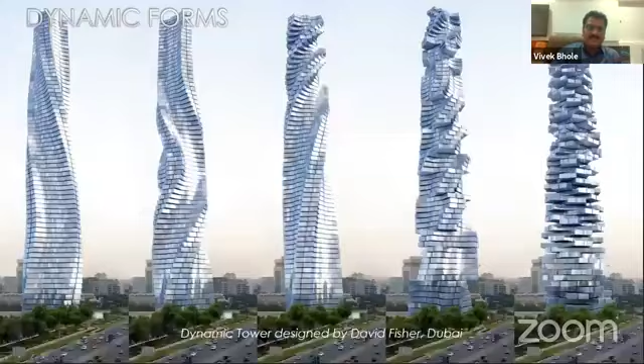So we have seen in past many years across the world, the skyline is changing. You can see the skyline in Hong Kong, London, Chicago, Dubai. Chicago is the birthplace of high-rise buildings, where actually the definition of high-rise changed. And then we saw a huge development coming up in China, particularly near Hong Kong. Then the twin city started popping up, called Shenzhen.

And I have seen in my lifespan of 35 years of practice, there are 2 new cities coming in between Hong Kong and Guangzhou, equally big high-rise cities. Then Dubai, we all know in the last 25 years, Dubai has gone from where to where. I have seen new places like Marina coming up.

And London was, you can say, a low-rise city for centuries, and suddenly got those high-rise buildings in its skyline. Not only these few cities, there are many more, like Sydney, and now even in Mumbai you will see a lot of high-rises coming up. This is inevitable because of urbanization and the maximum utilization of resources. High-rises are a must. So we'll be studying these topics today.

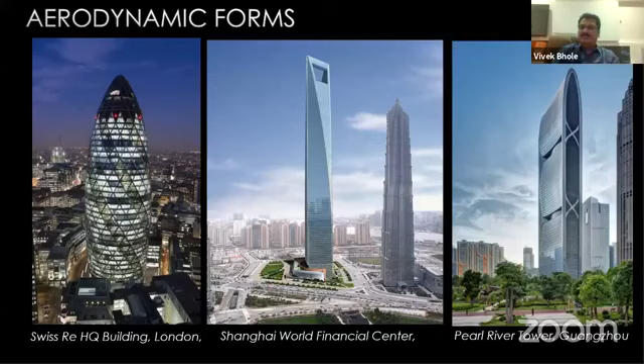Then these aerodynamic forms: the tower in London designed by Norman Foster, the Shanghai World Financial Center next to the Jin Mao Tower, then the Pearl River Tower at Guangzhou. Now, these are a few examples of those high-tech modern buildings.

Then this is something very futuristic, the dynamic tower. This is in Dubai, and the architect is planning to do something similar in many places in the world. So all these towers are in one place. How do we achieve them? Unless we know the methodology to construct and design, it is not possible.

When we design a small bungalow, the design or the planning aspect will preside over the structure. But when we design a high-rise tower, that too a super high-rise tower, the structural system is the most important. We say the high-rise building will fail, the design will fail, only if your structure will fail.

And the second is your vertical transport, because these buildings are so massive and the number of users is more. So if your vertical transport system is not adequate enough, not managed properly or not designed properly, it will reduce the

functionality of the building. In the types of structures, the very basic is the concrete frame tube, where the central core goes through the center of gravity of the building and takes care of all the lateral forces. In high-rise buildings, more than gravitational force, the horizontal forces by wind pressure and seismic forces are more stringent. And when you go much taller, the wind pressure will govern the entire design of the building.

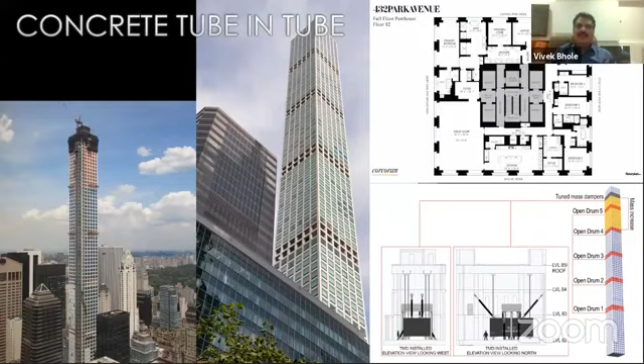It's almost a 60-year-old building, designed by SOM, and one of the very first buildings in Chicago to use this system. There are a few more, like 33 Canada Square in London, then Alcoa in San Francisco. They are based on the same concept.

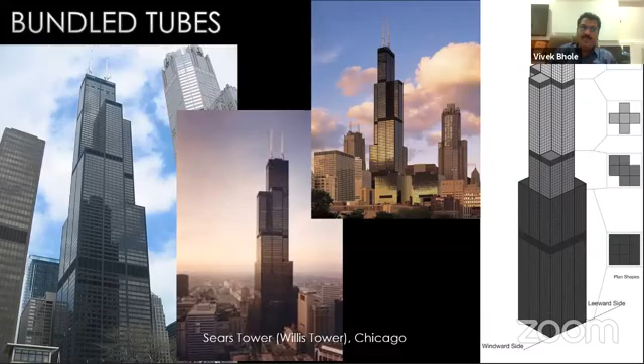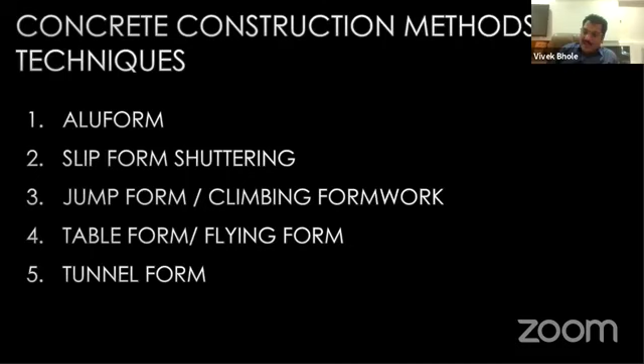So you may have heard about Mivan shuttering, because it's like a brand name. Mivan is a manufacturer's name, but people call all aluminum shuttering Mivan. So aluform is something similar to this, where you don't just cast one column, then the beams, the slabs and the staircase separately. The whole floor will be cast in one go, and the shuttering is then taken ahead to the next floor.

So you make a mold out of these aluminum panels, and you pour the concrete inside in one go. So if you see the staircase, the beams, the columns, the walls, everything will be cast in one go. So the construction is monolithic, the speed is faster, and the efficiency of the concrete is there. So you get additional carpet area out of it. So there are many benefits of it.

And particularly in India, because of the restriction on the sand, which we use in the concrete and the plaster, we cannot actually get good quality sand in many parts of India. There is a lot of silt and salt content. So in such cases, crushed stone can be used in the concrete, and the sand plaster, mortar plaster, is totally eliminated in this entire construction methodology.

In fact, in all the structural systems, in all my buildings, we are avoiding plaster completely. So the external fascia is either concrete directly, or if there is a cladding, then it will be cladded. From inside, there is no plaster. We'll just put some gypsum plaster or something like plastic putty. Plaster, being the weakest part, needs to be avoided. This is the concept of aluform.

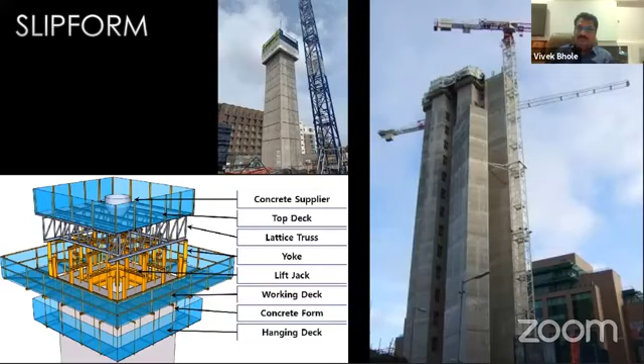You can see in the diagram, the concrete supply is from the top with the help of the crane and the hopper, and then the formwork and the scaffolding take care of everything, including the safety. And then the shuttering and this whole system keeps on going up with the hydraulic jacks.

This is one more system, table forms or flying forms. The tables are lifted by the crane and placed, and then this gutter kind of formwork, the ready-made shuttering, is there for the beams, and then the entire slab can be constructed. Again, these tables can be taken from below, lifted and kept on the top. So it is called flying form shuttering.

This is one more popular way of doing concreting where the speed of construction is very fast. In fact, many Turkish companies claim that you can cast a floor in almost 36 hours. The initial concrete strength can be achieved, and then with some minimal supports kept intact, the tunnel shuttering can go above and cast within the next 36 hours. So the speed is very good.

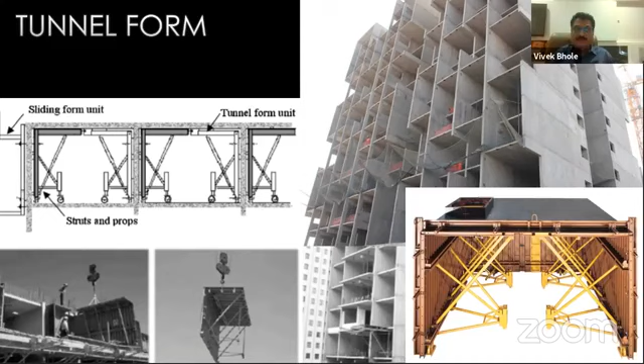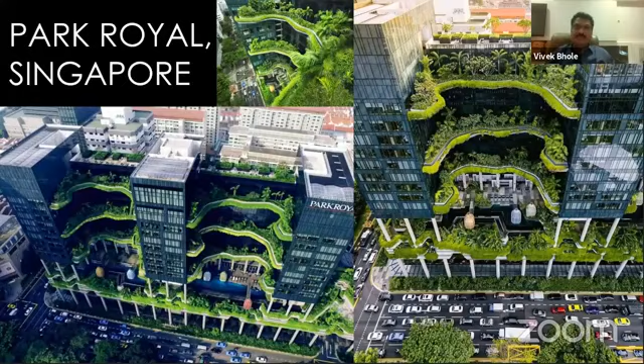This is one more project. This is at Singapore. Now, Singapore is a place where you will see all the good tropical buildings. This is not a high-rise building, I know, but it's a commercial building, and you can see the amount of greenery they could maintain on this. And because this is a hotel and commercial building, with a mall below, you can see the way they have actually done the landscaping on it. At the bottom level, it's a retail space, and you can see that triple height arrival and the public realm they have created below the canopy and those triple height spaces.

This is the entrance lobby of the hotel, and you can see the section now. Very interestingly, they have created this porous environment within the building. Making a massive building without greenery is what is being forced on us with the additional FSI they are giving in most of the cities, but Singapore has got a huge FSI, and still they could manage it with those porous forms.

Again, something similar. This is Oasia Hotel at Singapore. I have stayed in this hotel, and it's very interesting. Whatever form you see, there is a lot of porosity inside it. The outer skin is in aluminum with a lot of greenery, and those inner pockets have this natural landscape happening. If you see the plan here, the building footprint at the hotel level is like an L shape, and you'll see a lot of hollows happening here, and in some places here.

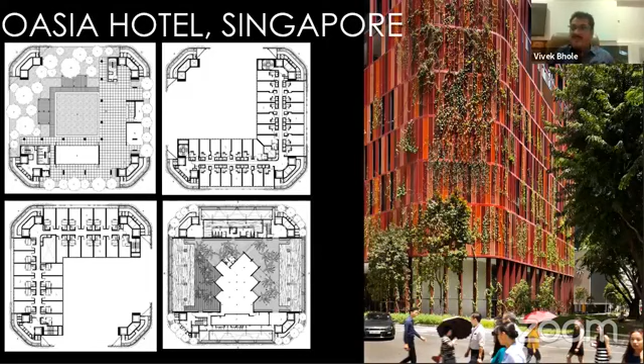So the outer skin is giving the entire form to this haphazard structure, but it doesn't look haphazard. It looks very interesting because it creates those semi-covered spaces within the building. Now, with the bylaws we are facing in Mumbai and most parts of India, we may not be able to execute this kind of project, but someday we'll get this freedom and we'll be doing something similar to this.

Then look at those sky lobbies, and there's a restaurant there, and from the top, the crown part. Now this crown is like 10 floors high. It's a hollow space, and you hardly require 2 or 3 floors for your AC outdoor units. The remaining is just to create the character of it. They could have actually gone for some photovoltaic elements there to generate an alternate source of energy, but I think the designers tried to achieve the form, the greenery, and the overall concept through that outer skin.

Moving to the case studies.

This is the first project. We are doing this for a group called Prestige from Bangalore, but the project is in Mulund in Mumbai. Now, this is a very scenic site. I've got a hill on the rear side, and in the rainy season, you actually see the clouds coming down. And this is properly a residential area. Then why am I making a commercial building there?

This is a question. So this is a very huge development, more than 1.5 crore square feet of it. And we already started 6 towers, 55 story plus. When we have got so much of residential, when you make a mixed-use development, you give people the choice not to travel and go directly to their workplaces. And that is what is going to be the ideal scenario in coming days.

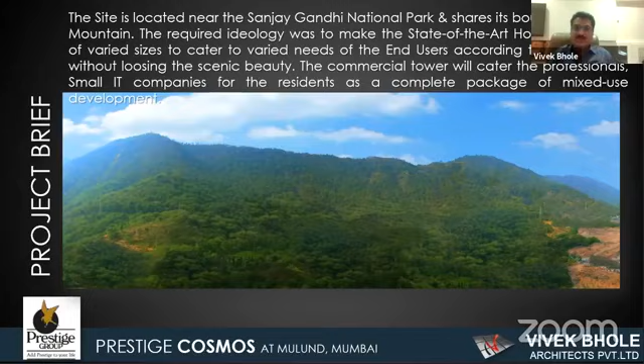When it comes to a commercial building, a very important factor is the column grid, the structural grid. As I said, in any commercial development, the live load is almost twice that of a residential building, even the dead load is more, and you require column-free spaces. And as I told you, for designing a high-rise tower, you require a structural system. So here the structural system is central core with peripheral frame tubes. The grid is 7.5 meters by 12.5 meters, particularly designed for the parking and the column-free office spaces.

Then we wanted free movement of cars, because this building is 8.5 lakh square feet of carpet area. Considering the basic minimum requirement of 75 square feet per person, you'll have more than 11,000 people working there. But in Mumbai, there are many office spaces where the density is less than 35 square feet per person. In that scenario, the user load will be tremendous. You require good movement space there, particularly the separation of pedestrian and vehicle movement.

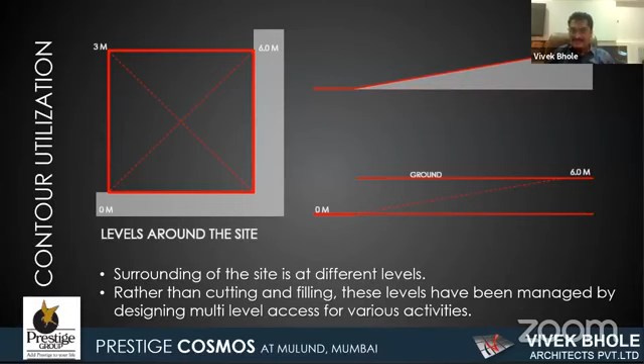Then the requirement was so peculiar that we had parking in the basement. We wanted a complete lobby on the ground floor and part of it on the first floor, then the podium on top, and then the office floors above. This makes it really tricky, because you enter at some level without disturbing your entrance lobby. Because, as I told you, more than 11,000 people are going to come there. And in a commercial building, the most tricky is the vertical transport, because the peak hour is very short.

In a residential building, we consider a peak hour of 6 hours. But in a commercial building, the peak hour is hardly 1.5 hours. In the morning, 9:30 to 11 o'clock, that is the maximum user load you have to take care of, and the same happens in reverse in the evening. So your vertical transport has to take care of that, and you need a good waiting space. So the lobby is very important. I didn't want to disconnect the lobby because of the parking in the basement and above the lobby. So I kept a scissor ramp. Now, this is a very interesting concept.

This is a scissor ramp which is inside. So scissor ramp is a concept where a ramp is always helical. When you go for multi-storied, multi-level parking, it's a helical ramp. But just imagine two ramps parallel to each other going up. So one can be used for going up, the other can be used for coming down. So they are interlinked two ramps.

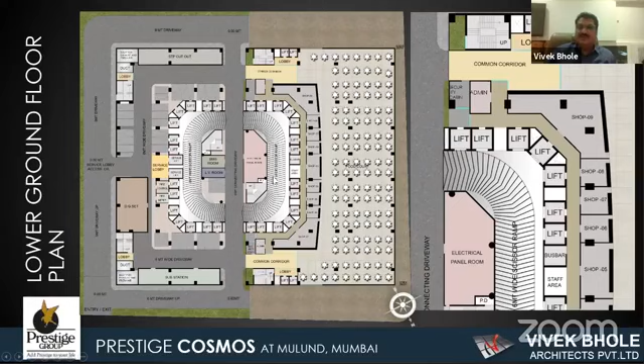So now this scissor ramp will lead me, one ramp will go up, one ramp will go down. If I come here, again, I've got one ramp going up, one ramp coming down, because these are actually two helical ramps, as I said. And then I've got a huge food court with stalls on one side, and a service lobby and service storages here. This is one level below the food court. So I've got a full basement there. My services are there, and efficient parking.

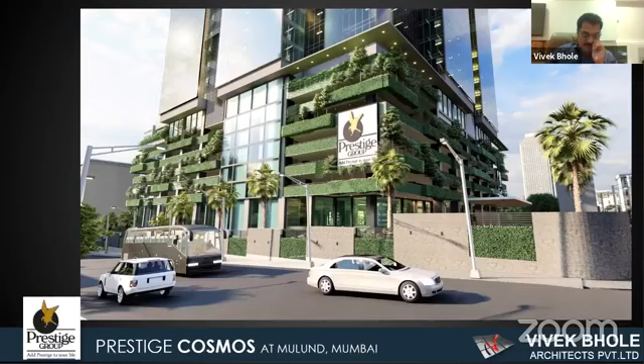This is just a first cut view of the podium. And then the amenity floor plan. With such big offices, you require a lot of amenities like a multi-purpose hall. You require recreation, daycare center, library, meeting rooms, conferences, banquets, gaming zone, fitness centers.

And then the typical floor plan. Now, as I explained, the column grids, these columns in the periphery, are not going to take care of any lateral force. All the lateral forces are going to be taken care of by the central core. There's a huge concrete mass which is going to take care of that. If you divide this building into 4 corners, you consider this as one wing.

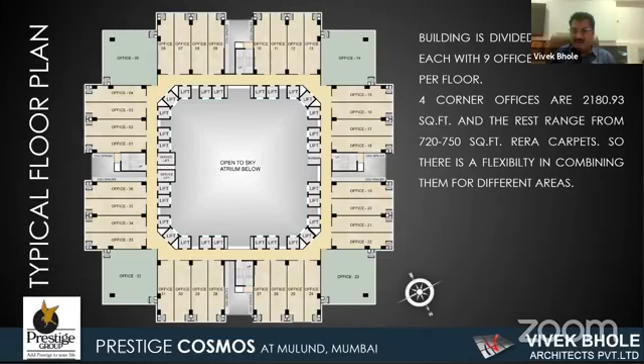So when we see the number of elevators, in fact, when I started the presentation to my client, if you have heard about Prestige, they have executed more than 2 crore square feet of commercial spaces in Bangalore alone. They were not really convinced with the idea of having so many elevators in the center, but the requirement was such, and when we showed them this, I told them this is going to be one wing. And just because all the wings are interconnected, you are seeing that series.

So there are only 7 elevators. And the service elevators are common for all 4 wings. So when you've got only 7 or 8 elevators per wing for such a huge user load, then it is sufficient. He was a little skeptical. So we had to do the entire lift analysis. And then they accepted this.

This is a schematic plan where we have got the basements below, the ground level, as I explained, then the parking which is there on top of the entrance. Now, to explain properly, the scissor ramps are actually acting in this central zone here. They are connected. So when I enter, I can actually go inside at the ground level, I can go inside the basement, and the same ramp I take to go up to the upper levels without disturbing my lobby at the ground level. And this is the view.

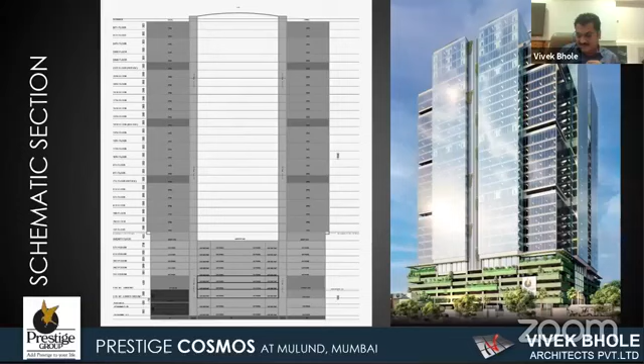These are the basic parameters. It's 8,34,000 square feet of FSI. So almost similar carpet is there. Total built-up area is around 18,74,000 because of the services and parking. The total height of the building is restricted to 120 meters. So 26 habitable floors, plus podium, plus amenities, etc. And then a 2-level basement, 5-level parking. The FSI versus carpet efficiency is very important, because what you construct, if you cannot sell, is not going to be useful. So that is 95%.

So we sat with different consultants. I worked with Lerch Bates, Tak Matthews, and many other consultants, along with the lift companies, for various projects. So I took consultants' help to generate this, where I wanted the maximum traveling time not more than 1 minute, and maximum waiting time not more than 1 minute.

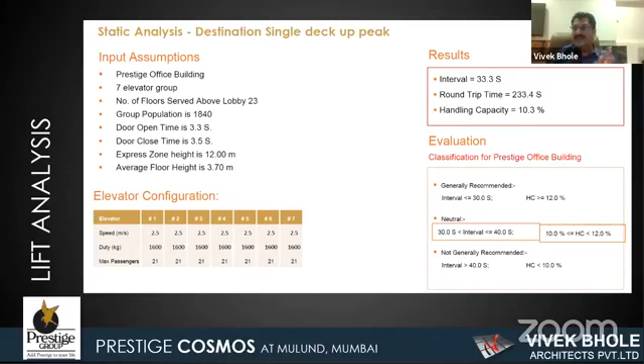And to achieve this, we studied different variations, and then we tried to change those parameters and did the iterations to achieve maximum efficiency in terms of the traveling time and the user load, and on one side the cost. So if you see here, we tried to change the number of elevators. If the number of elevators is 6, what will happen? If the number of elevators is 8, how much handling capacity can it take care of?

Then if I change the speed of the elevator, it is a very important factor for cost implications. Just for the sake of example, at 2.5 meter speed of elevator, let's say if it is costing 30 lakh rupees, if I go for 6 meter speed, it will cost me 2 crore rupees. And if I go for 9, it will cost furthermore. So here the maximum speed we tried was only 3 meters per second, because the building is not a super tall building. My next case studies are super tall, so we'll see even up to 9 meters per second speed.

Then here we tried to play with the size of the elevator, like 19 passenger, 21 passenger, 23 passenger, what will happen? And then the group population. So we tried all these iterations and we came up with the solution. So this was the first project. Now, why particularly did I show this project? Because it's a voluminous high-rise commercial building. We don't have many tall commercial buildings in this part of Mumbai, although there are many in the city side.

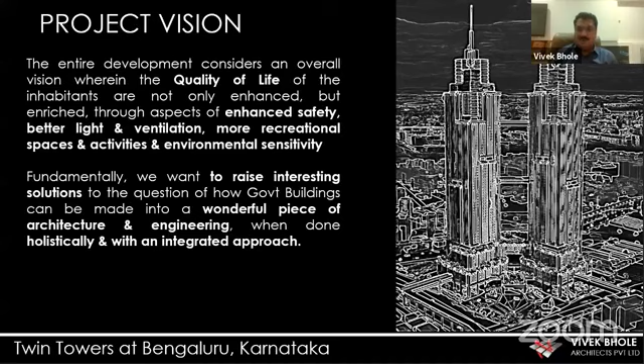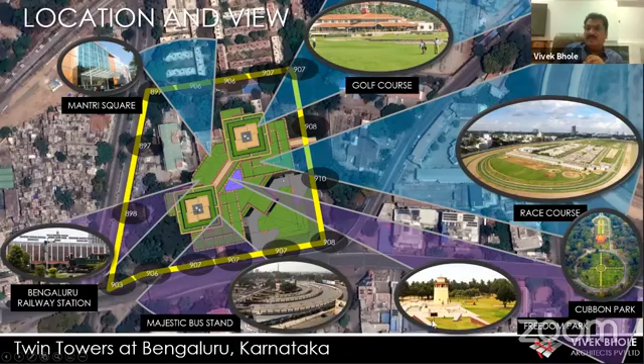And then these are the views. On one side, I am seeing the race course. On one side, I'm seeing the golf course, the Mantri Square, Bengaluru railway station on this side, and the Majestic bus stand. This is what we wanted to connect with the building with the skywalk. And then Freedom Park and Cubbon Park, these are the two parks which are visible in this direction.

So how do you achieve the economy? By reducing the footprint of the building, because anyway we had to go for 50 stories, and with the structural system we selected in such a way that it will give me maximum economy. So we'll see that in the next few slides.

So core area is only 23% of the total building footprint. And the vertical transport, I have achieved that 1 minute waiting time, 1 minute travel time by having a few express elevators. So again, they are in the next few slides.

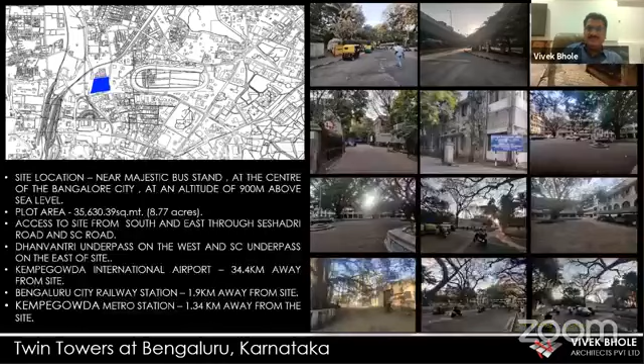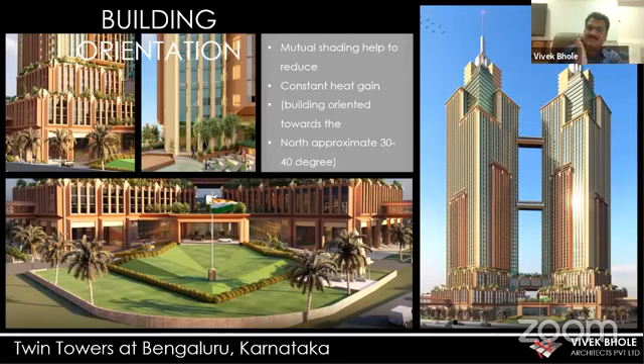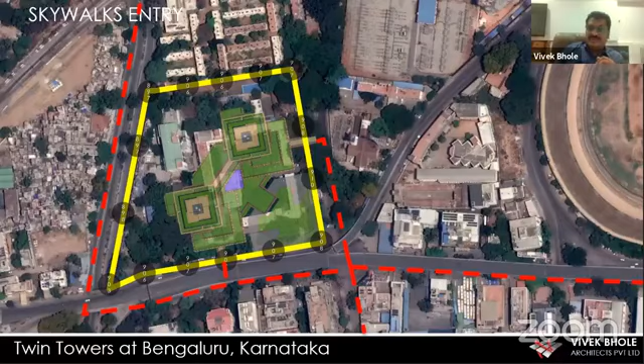So these two red lines are actually the skywalks which are connecting Vidhana Soudha and the Majestic bus terminal. For internal, these are the vehicular movements. The green is entry to the existing building, which they wanted away from this proposed building. These are the entry and exit points.

Landscape is a very integral part of architecture design. Particularly for this project, we were very careful about it. We divided this whole into different zones, and then, like we said, life, space, and buildings. And we created that different hierarchy into that, and we segregated different zones.

So public zones are there because there are a few people whom we will not allow on the upper levels. This is an office building, security is important, but there are amenities which will be accessible for visitors. So the public zones are very well defined by the landscape also. The circulation is very important. So there also we have segregated visitors and the users, and we have used a lot of landscape in the facade here.

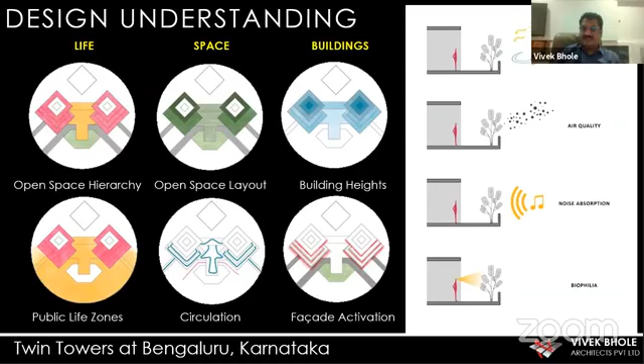Okay, I'll not go into this in detail because there are two more projects to explain, but we had a lot of thought process in designing those green spaces. We had a lot of interactions with the landscape architect, and because I had those terraces, we wanted that design to be biophilic. So the interior space and the exterior space should be just an extension of each other, and how efficiently we use them, because any landscape area which is not accessible or not useful functionally will not be maintained. So we wanted every part of that landscape to be useful.

Then the design approach was, we wanted to create one good impression at the entrance, the vistas, the grandeur, the top-up experience. So we created an artificial mound. I'll show that. Then there was some area where we created a mini forest kind of thing where people can sit inside those shadowing trees. Outdoor gym was there, and a jogging track is planned on the top of the podium. We have got podiums at different levels, so in one of the podiums we give access to the jogging track through the wellness center.

Then at podium levels, we created that space which is a spillover of restaurants where people can sit and have lunch. And there are a lot of activities which are stress-relieving activities, and community activities like people meeting, having good discussions. There's an amphitheater, and finally on the rooftop we have got some very VIP offices, so we have got landscape connected to that as well.

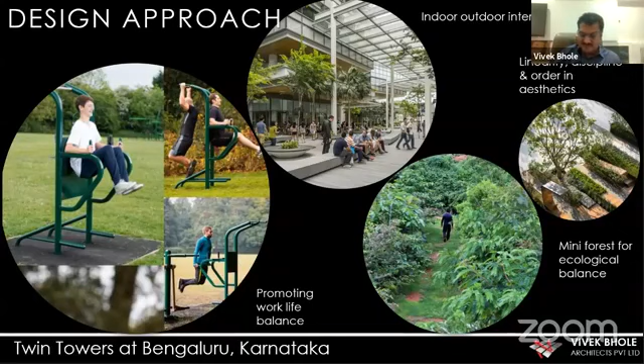So this was the design approach where we wanted to give them work and life balance. It's not just that they are working there; they are spending the maximum time of their life in those spaces, because they go home for sleeping and eating, but when they are awake, they are in this space. So again, this is the approach we had. All those porous elements and tapered elements we created, we uniformly distributed. You will see in our design how we created that interaction of the green spaces and open-to-sky spaces with the covered interior spaces.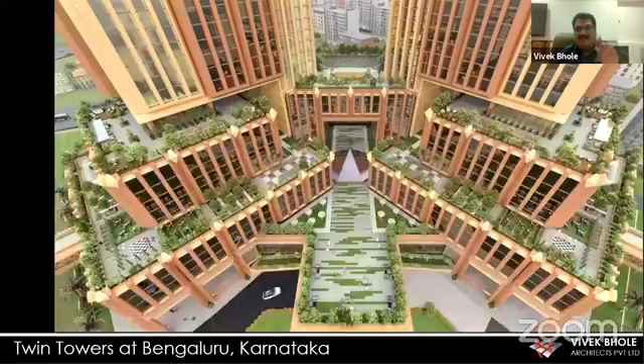When it comes to aesthetics of the building, the vertical elements accentuate that verticality. Your vertical building looks more vertical. If you see these examples, those vertical elements are my sun-shading devices as well. Then spires are always inspiring. All across the world, the tallest buildings, when they claim to be the tallest of the city or the country, achieve one more bonus height through that spire. It is not just for the sake of aesthetics or a symbol of victory. It's functional as well. It's a lightning arrestor, sometimes an antenna, but a lightning arrestor for sure. And that gives the iconic element to the building.

So my spire was the tapering element, starting right from the building. The last floor is also usable, almost 4,000 square feet of usable space, and then the spire is there. So it's a functional spire. And this is where the maximum appreciation has to happen, because this is the most visible angle from the flyover, from the road junction to the building.

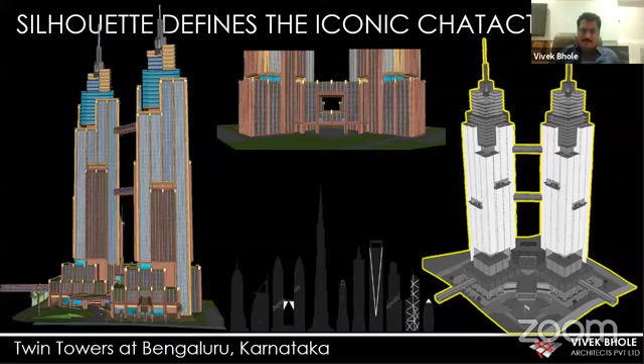I always believe that any building which has a character you remember, you don't remember by the detailing, because as a passerby you see a glimpse of it and remember the building by its silhouette, the outline of the building, not by the elements. So the building outline was achieved with those punctures in between created by the two sky bridges. There's a lobby. The lobby at the other level. And then this is just a lighting concept.

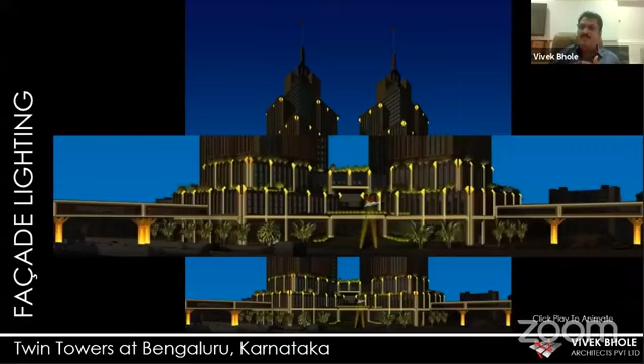So lighting will keep on adding gradually, depending upon the day, the festive season, and the time of the evening. The lighting can be simulated. This is the detailing we use, pixel line detail. You get tremendous flexibility when you use these kinds of fixtures.

A lot of green building considerations were there, because we wanted this building to be a platinum rated green building. Small detailing, a lot of thought process was behind it. So not going into the detail, but there are many slides on this.

More than that, we wanted this building to be not just a green building for the namesake, but actually a good livable building. So we have got this green roof, the heat island effect to be negated with native plantation, and then we have got good rainwater harvesting, outdoor green spaces you saw, and a very high performance building envelope.

Now, the building envelope is formed of two elements. One is the vertical elements, which are actually precast elements, and then the glass, which is high performance glass. We have got photovoltaic cells on the top portion of the crown, and then sky gardens at individual floors.

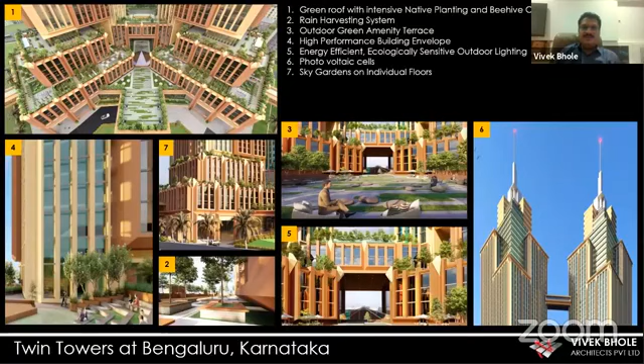So these are all actual rendering pictures of this project, where we wanted this to happen across the periphery of the building, the decks and the podiums.

This is a very important factor, how to make your building earthquake resilient. So the central core, as I said, is going to take care of your seismic forces, and the peripheral columns are only taking care of the vertical load. The wind tunnel testing will be done for this. This is the structural system we are suggesting.

All the peripheral columns are composite steel columns, where the steel tubes will be filled with concrete, and then steel decking sheet will be used. On the steel decking, you don't really require any shuttering. You just pour the concrete and leave the decking sheet as it is.

And from below, if you have noticed, all the structural members are plastered. That is a fireproof vermiculite plaster. Then to take care of the lateral force, viscous dampers will be introduced at intermediate levels.

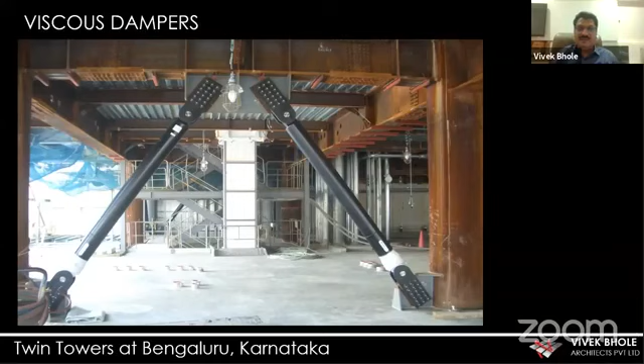Then for fire safety, one additional provision is the sky bridge, which is connecting these two towers together. So you get alternate means of exit. Then staircases and lift lobbies are pressurized.

Maximum chances of fire are due to the electrical cables. So that is avoided with bus bars. We'll have rising mains through which the electricity will be provided. Then a separate fire lift is there, and a separate fire staircase is there on the outer wall. You can see it here. Then refuge area across the periphery.

And then the core has got multiple entries and exits. So even in the office floor plate, you can actually run into the core with various exit routes. The core is designed in such a way that you have got maximum options for exiting. And then sprinklers will be provided. All these fire requirements, the codal requirements, will be taken care of.

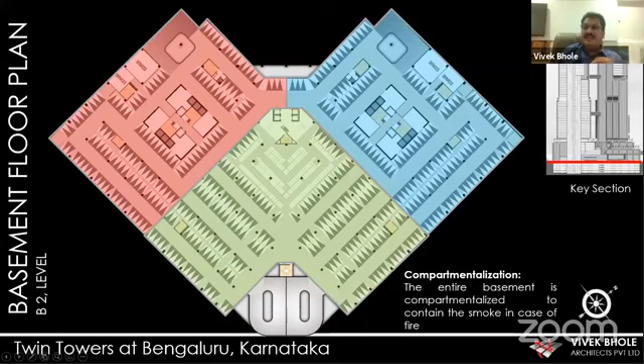A very important part of the parking system is compartmentalization, where in case of fire, the smoke doesn't enter into the other compartment. So this is how the compartmentalization will be done. And then the exit distance. From any point to the staircase, the maximum exit distance is 30 meters.

So if you see all the staircases in my complex, they are covering the entire footprint of the basement. You have to place the staircases in such a way that one need not travel more than 30 meters in case of any mishap. The normal firefighting system, the codal requirements, fire detection, alarm system, I'll skip this. Public address system is a very important part of commercial buildings.

Access control. From a safety point of view, the barrier, turnstile and flap barriers are very important because you don't want the public zone and the private zone mixed up together. It is very difficult to manage that way.

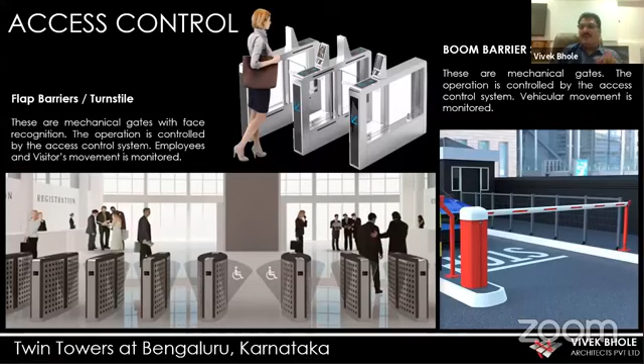And these kinds of buildings are mega buildings where more than 15,000 people will work. So in such cases, you segregate them at the entry level. There are multiple entrances, multiple lobbies, and you segregate them with multiple options like RFID, fingerprint, and face recognition.

Then surveillance is a very important part of safety and security. And in a pandemic-like situation, the elevators will be touch-free elevators, and then the lobbies, you need to have huge lobbies. Like if you see, the lobbies are so spacious. Here, the lobby is a double-height lobby. For these 3 elevators, there is huge space to stand there.

The main entrance is here. So we have segregated those different entries. Like this is the lobby for the express elevator. This is the lobby for the amenity floors. And this is the lobby at the lower level. So we have got 2 different entrances.

The pedestrians are entering at the ground level. The vehicles are entering at the top level because the porch is raised. If you have noticed that mound there, the vehicular access is at the top level, so that you've got multiple options of entering into the lift core so that they are segregated properly. That is what is also needed in the current situation.

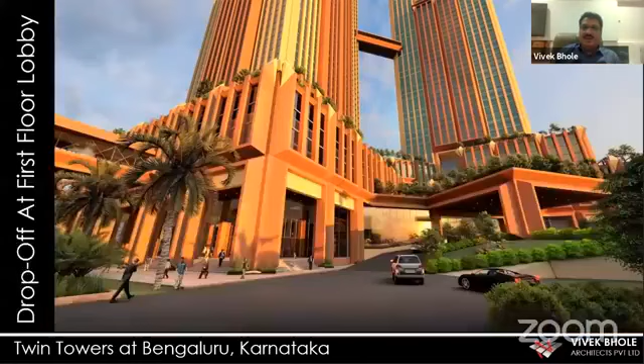At this level, this entry is not there. At the ground level, the entry is here. So through the colonnade, you enter through this entry here. So these are the pedestrian entries, and the vehicular entry is at the first floor level. Yeah. So this is the first floor, and this is how the entrance on the ground floor and the first floor is happening. So this is that first floor entry going on top, and then this is that colonnade which is giving entry at the lower level lobby.

So on the second floor, we have got this auditorium, and then we have got different lounges, lobbies, business centers. These are the amenities for the offices. This is the view from the second floor into the first floor double-height entrance lobby.

So this is the third level where we are actually seeing the double-height auditorium's top part. Then we have got banquets, a huge food court, and a restaurant. So all the eateries are here. Some fine dining is there, a part of the food court as well. And this is the level which is connected with skywalks on both sides. Then there will be a security check, and these two elevators will either lead them to the entry level if they want to enter into the building, or if they have got enough accessibility, they can go inside these areas.

So this is a schematic section. The sky bridge is connecting that second floor level. We have got double-height retail space. This is a colonnade here. We have got 5 basements, that is allowed in Bangalore, and that is kind of mandatory. And then we have got these amenity floors.

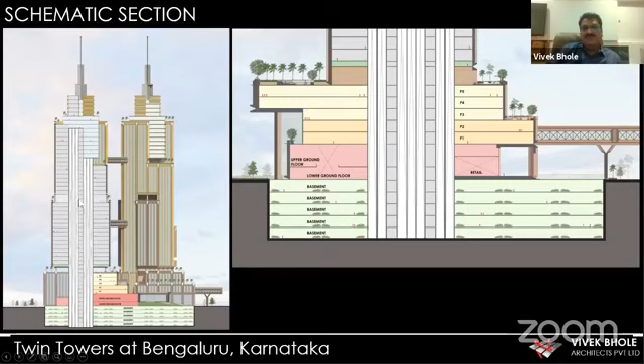Then the upper deck level, this is the top level of the podium where we have got this amphitheater happening here, and then the towers above. So in this section, you will see those 2 skywalks connecting at 2 sky lobby levels, and then we have got these refuge areas across the building.

A very important factor is how you achieve that efficiency in the lifts. So in the single shaft, there are more elevators. If you see, they are segregated. Some text is missing here. So these blues are the express elevators.

And then in elevator set D, you have one set of elevators serving the lower level. So you will see there are actually 3 sets of elevators. A few elevators connect the lower levels here, a few connect here, and a few connect here. So in one shaft, there are actually 3 sets of elevators. That is how you achieve your efficiency.

There is software called Elevate, which simulates the user load and the movement of the elevators, and how you take care of the movement of the people. So there is the sky lobby here, and there is one set of express elevators stopping here, which takes care of this portion. So you have to do it very carefully.

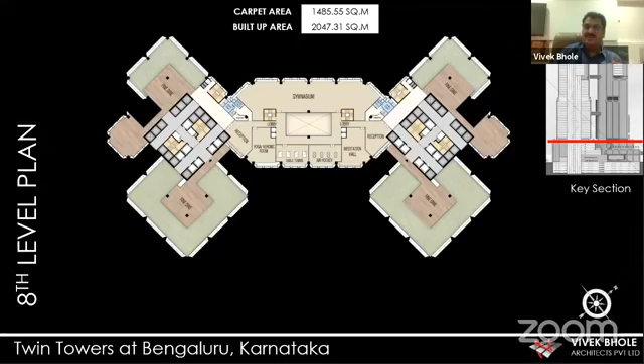And then the typical floor from 11 to 14, and 15 to 16 are the refuge floor area. You will see it in the schematic section. And you can see the way we have divided the offices. This is the core, and offices have direct entry from the core itself. So there is no corridor as such. You can divide this whole floor plate into 7 offices without adding a single square foot of corridor.

And then the top levels, 53rd, 54th and 55th floor, the offices. Now you can see very few elevators access those offices. They are dedicated elevators, the service elevators are there, and the minimal requirement of the core is there. Of course, for this kind of public building, you need to take care of physically handicapped people. All the toilets, ramps, staircases, lifts, walkways need to be taken care of.

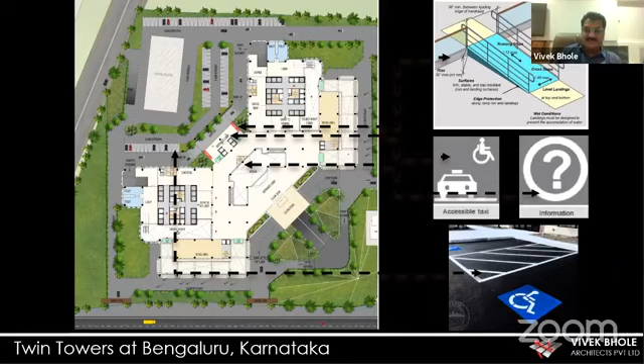Now, sustainable building design to take care of the urban heat island effect. All the terraces are converted into softscape, which will take care of that heat island effect. Then these are a few features we have used. We don't really want maximum turf or lawn area, because they are not really good for green building, so they are minimized wherever required. Maximum shrubbery and plantation, the trees are there.

Building envelope: the glass is very carefully chosen. The vertical elements I have shown on the top level, where I have that glass cuboid as the crown of my building. I have horizontal sun shading devices, and then a combination of DGU and low-E glass. That is what will give me the efficiency in energy.

Then water management. All these features are there. We know minimum water exchange, minimum water use. These fixtures are there. Then we are going to use double flush, and then we are going to have a lot of percolation happening. All the paved areas are permeable paved areas, so the groundwater will be recharged.

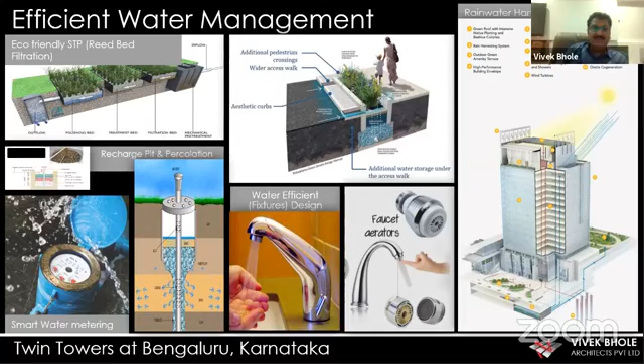Role of colors, a very important factor. So we have used all light colors in the horizontal surfaces so as to reflect maximum sunlight. And then all these elements, simulations, they are part and parcel of our architectural design. But because the architectural character itself was so powerful, we found that hardly anything additional was needed.

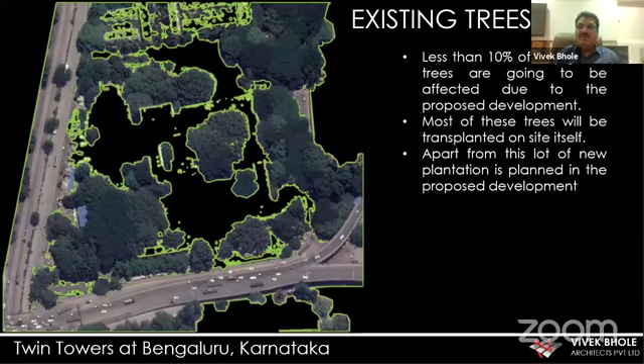Local material we are going to use. So we have got a lot of granite in Karnataka. This is very important. This is the footprint of the trees, this is the greenery which is there on site currently, and we are only using 10%. So these are the existing buildings now, and this is our design. So we are hardly touching any full-grown tree there.

This is an important factor of this design. So we are using this monolithic insulated concrete system, which is a composite steel concrete system, where a hollow steel member will be filled with concrete. And this particular system doesn't really require a supporting scaffolding system. The members are executed in a factory in Bangalore itself. So this is the kind of beam member which is being fabricated in the factory, and this is a column member which is being fabricated in the factory.

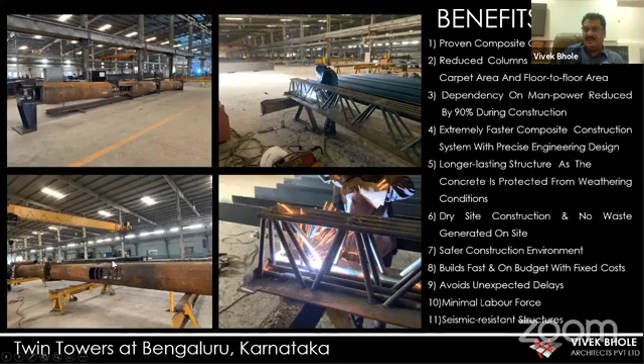And then without any support, the beam will be erected on the structural members, and then the second phase of concreting will be done. So if you note, part of the beam is already there, and once this is placed properly in place, the remaining concreting will be done. So this is a composite system which is fully self-supporting. As I said, there are no props required. This saves a lot of cost. This is quick, saves a lot of time.

Then fire safety is there because most of the members are encased in the concrete. It is seismic resistant. The sections are very narrow because this is a composite system, so the sizes of the members are very less. As I said, the fire resistance is very high. And then it's a longer lasting building, the building life is more because the main structural system is steel, and then flexibility is there.

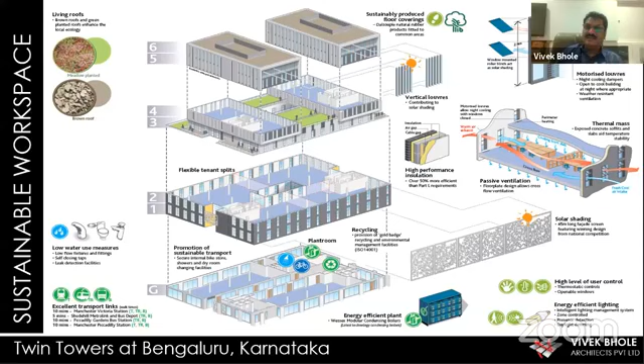Okay, I'll skip this, this self-financing scheme. These are energy efficient features of the building. I'll skip them, but there are a lot of them we have discussed. Inside the office also, we have got the combination, how the passive ventilation is done, how the recycling is done, everything is there. IBMS is a very important integral part of smart buildings.

So they take care of everything like air conditioning, ventilation, lighting, hydraulics, access control, CCTV, fire detection, lifts, and many other things. When we say ventilation, let's say there are 5 basements. You cannot keep all your exhaust fans running all the time. So you have got those carbon monoxide detectors. As soon as the level goes above the permissible level, they will start operating the fans. Something similar is going to happen with the common area lighting. So the sensors do a lot of energy saving.

Even in the curtain walls, in case of fire, the automated panels open up and the exhaust will start working in case of some double height areas. So that kind of IBMS system can be integrated into the building. Then the building and development requirements, I'll skip this.

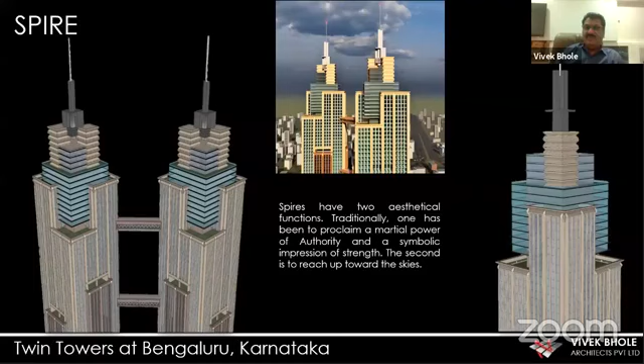Okay, these are a few architectural elements like the sky bridge. You can see the same vocabulary of architecture is derived from the building and integrated into all these elements. The colonnade, you will see something similar. The spire, as I said, is a very important aesthetic element for our building. And that's it. This is the second case study.

Ma'am, do we have time for the third and fourth?

Harshada, ma'am? Yes, sir. Okay, so I'll take 35, 40 minutes more then. Okay, fine. No problem.

This is one building we are doing in Mumbai. This is at Worli. So this is the layout. We won this competition. It was an international competition held in 2016. This is kind of the biggest urban renewal project in the entire South Asia, almost 3 crore square feet in total. And we have got the roads.

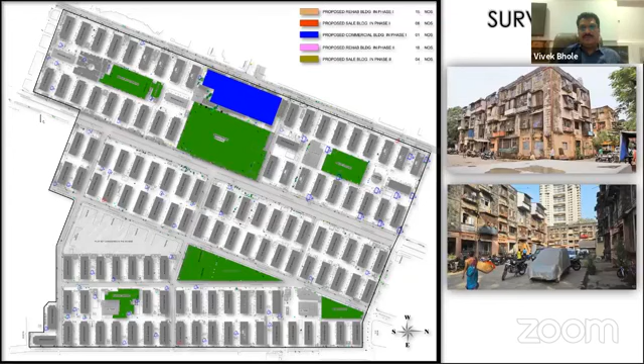So this is it. We have got around 33 40-story buildings. All these small buildings you see are 40-story buildings. We have got 10 74-story buildings, and we are going to talk about the central building, which is a commercial building. This is a 60-story commercial building.

And on this entire development, work has already started. Tata Projects are my contractors there. Government of Maharashtra is my client. This is the first of its kind development the Government of Maharashtra is doing as a developer. In the entire layout, we have got almost 8,893 existing chawls. These were constructed by the British almost 100 years back, and they are in a very dilapidated state.

For a very long time, redevelopment attempts have been happening, and currently the government is very active and very prompt, and there is a lot of willingness to do it on war footing. So the work is moving very fast. We have got some non-residential tenants. We have got schools as tenants. These are the units of schools.

Then we have got a boys' hostel, hospital units, municipal dispensaries, and a lot of slum dwellers as well, and there are some stalls. So altogether, about 1,150 odd members are to be rehoused, reconstructed, and then the sale component will take care of the construction or entire funding of the project.

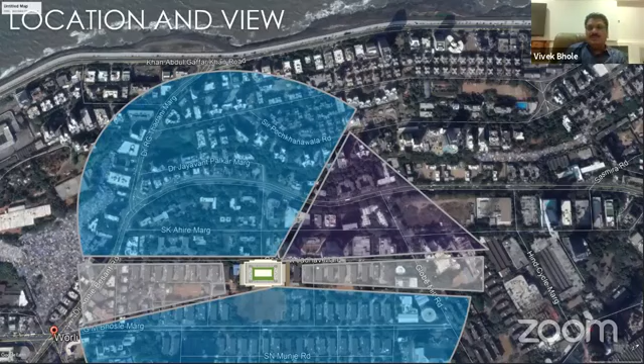So this is the entire development, this is where my residential buildings are coming up, and this is where I'm designing this commercial building. The entire concept is an exoskeleton. I'm using a central core with a diagrid exoskeleton skin in composite steel. These are not exactly the ones I showed you in the previous project. These are going to be hollow round pipes filled with concrete.

You can see the lower levels are podiums. On the upper levels, this outer skin is there with slabs in between and different floor plates as per the shape of the building. This forms the character of the entire building. The whole building design, from the basic structural system, the facade and the shape, everything was designed through parametric software, including the smallest detailing of a mullion and glass.

So I wrote this definition to create the entire building exoskeleton and structural system. This is how it is going to work. If you note, these stars are a little bigger on the lower level, and they become slender and almost parallel as the system goes up.

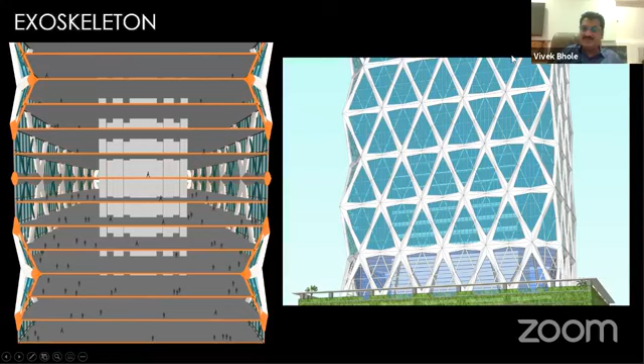The parking is very interesting here because this building is going to take care of more than 14,000 people working in it. So I needed multiple entries and exits, with vehicular and pedestrian traffic separated. I used both roads for entry and exit, and for vehicular traffic I used big 9-meter ramps to reach the drop-off level, and thereafter two separate sets of ramps, one going up, one coming down, 6 meters in width.

So they are actually two double driveway, one-way ramps, and this is how the parking is working. So once I start climbing up, the blue one is for coming down, the green one is for going up. So once I start going up, there is this drop-off area, and then I have to just keep on climbing up, and then I reach the 8th floor level.

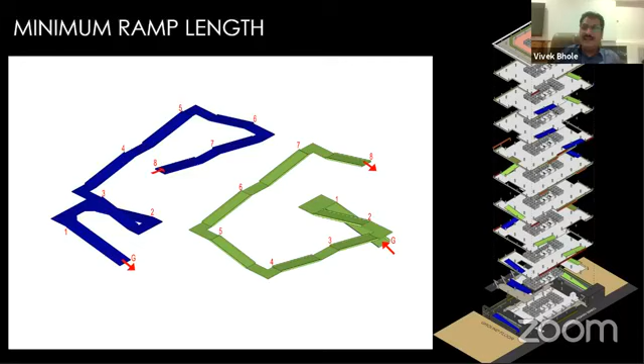When I have to come from 8th floor level, I come down, and then there is this drop-off, and then I come down this way. So instead of just taking those rounds and rounds, those helical ramps here, because the levels are a little more, number of parkings are more, I've tried to achieve that efficiency of movement through minimum bending kind of thing. And these are the podiums.

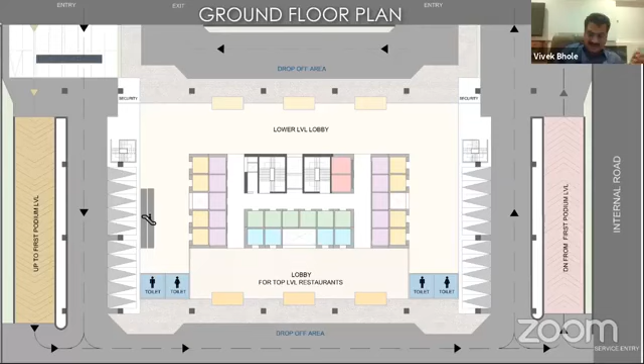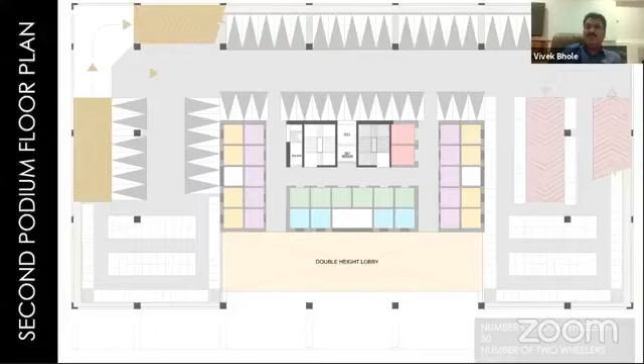So every time the position of the ramp changes, as I said, the ramp keeps on moving, so that the person will climb along the ramp. Yeah. And then on the top level, this is the E-deck level. I got a swimming pool, and then I got a club and other outdoor activities.

So almost like 1,580 parkings, four-wheeler parking. That is what we have accommodated in this. These are the different level plans where we have got those different iterations or alternatives for the sizes of the offices, because this is a government building again. And the offices, I don't know exactly what is the requirement today, but then right from 728 square feet to 3,000 square feet of office spaces, I can have complete floor plate of smaller offices.

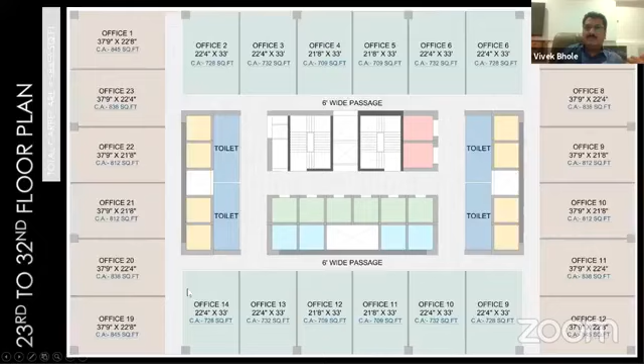Then if you note the central core, now the lifts are removed depending upon the stacking system of my lifts. Now this is the space which is not actually having any vertical movement. So I have converted them into toilets. So when I got toilets in the common area, I removed the toilets from the offices across. When I got offices and no common areas in the lobby, you'll find the toilets are there, and every toilet has got a shaft, ventilation shaft there. So this ventilation shaft is right from the bottom, and it is giving ventilation to the staircases, to the toilets.

Here you'll note that the express elevators are opening on the opposite side. This is the gathering space, and from here you have to take the elevators to reach to the next level. So you'll have to change your elevator here. This is the sky lobby level, and then this is a typical floor. If they want only 4 offices per floor, then how the floor plate will be divided. Very minimal columns, and then the restaurant and viewing gallery. This is the view, the body of the building.

The structural system is very peculiar. As I said, I've got huge column-free space there because the leasable area I want more. I don't want restriction on the sizes of the offices. And the diagrid system is my facade as well as my structural system. So that is going to take care of the gravitational forces. All the lateral forces, as I explained, will be taken care by the central core.

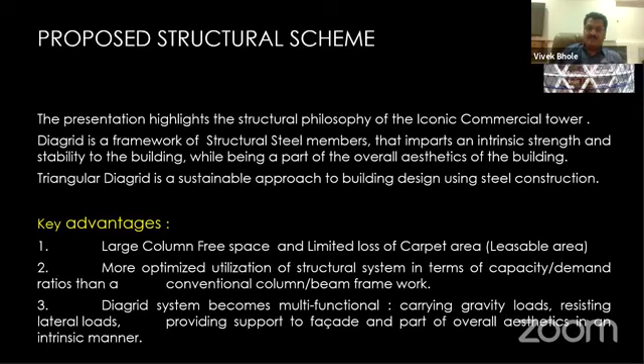Then again, I got steel deck slab. So this is how the steel deck slab is constructed. The GI sheet is laid, and then on top of it, the minimal reinforcement and the concrete slab is casted. So it takes very minimum time, and you don't have to worry about the shuttering at all. This is how the central diagrid and core is going to work. It is going to take care of the lateral forces. The diagrid is going to take care of the lateral forces. I've taken care that the junctions of those diagrids are going to go straight without any floating.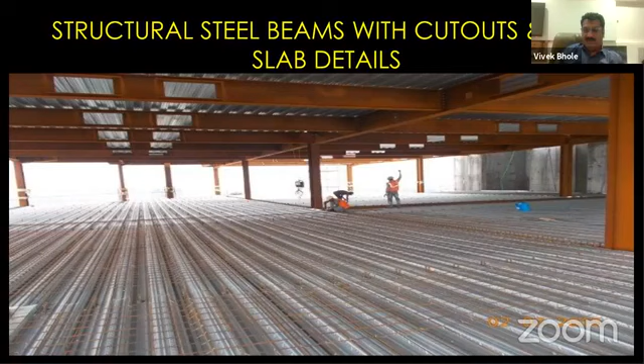And this is how the deck slab and the steel beams will be there. The central core, the diagrid in the periphery, and those steel beams. And on top of that, there will be deck sheets. So you can notice those cutouts in the beams. And they will be cladded with vermiculite plaster for fire safety. So diagrid, the gravitational load system is very well known. All the skin will take care of those forces.

We have done the ETABS model of the entire thing, and we checked the deflection, X and Y direction deflection, and the period of sway. And we have come to a displacement very much under the permissible limit for wind pressure. So this is a very efficient system. We could not achieve the same with the concrete members without diagrid. And then the force distribution, I'll skip this. These are the junction details, how the diagrid will be casted.

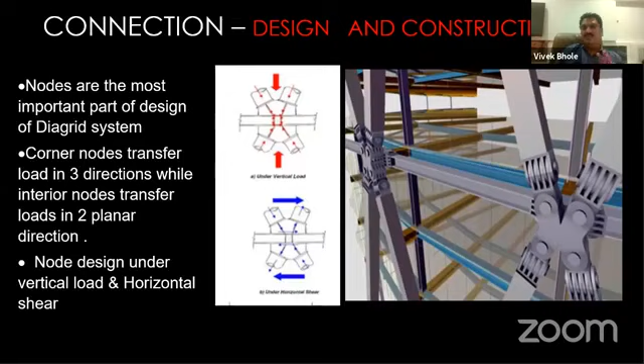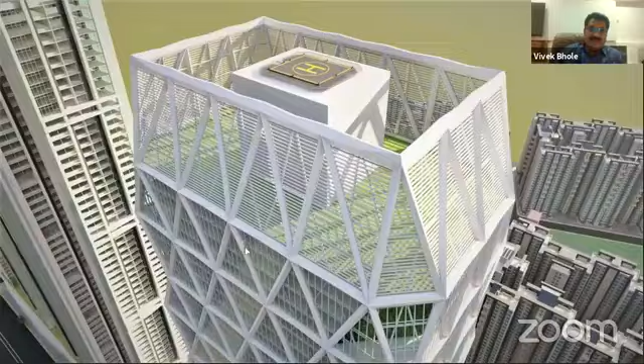Stage distribution, construction methodology. I'll again skip this. Internal testing, yes, I'll skip this. And this is the facade which is going to be there. So we have got this internal structural member, and the outer is cladded with composite panel, solid core composite panel, and then the glass.

Most of the time in structural glazing, you don't really connect it with the member. As I told you, I have seen the negative points of that connection of the facade system with the structural system. In Jinmao Tower, in the hotel, it was a nightmare. But here we have kept a provision where the structural member is not directly touching the facade system. This is the entire view.

Landscape has got again many design considerations. So we thought of different policies for designing the facade of the podium, because it's a bulky massive structure which is visible from the road level. So we wanted some green curtain kind of thing to cover it. So this is section type 1, where we have got those flower beds coming in and out of the building, and we have got that plantation happening on it.

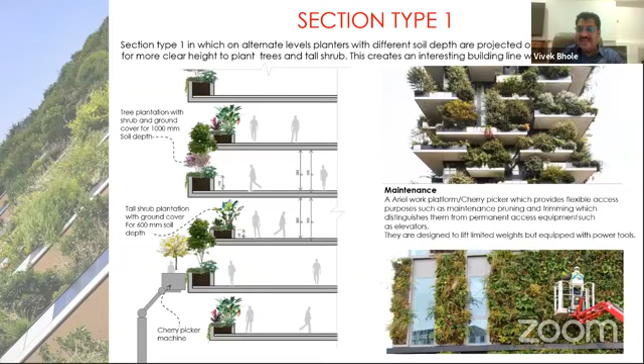Then there is a concept of vertical forest. So there are these 3 different strategies we use. The first strategy is vertical forest. We have got a selection of plants and trees in such a way that throughout the year they will give that forest kind of effect, and you can see that entire facade with those plants, and we are going to allow the birds to nest inside. If at all we want to put the bird net, that will be from inside the planter. So we want birds and butterflies to habitat there.

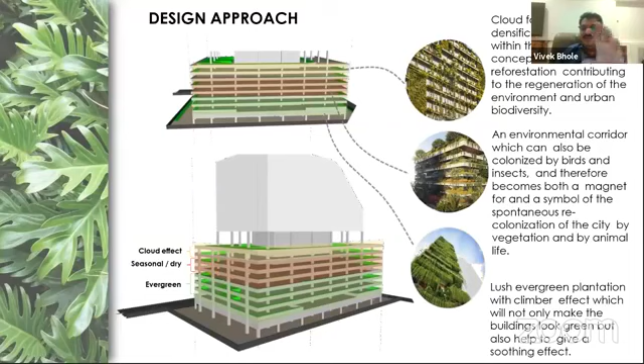And then there are different strategies where we wanted the top layer to be a cloud effect, the central layer of the podium facade to be seasonal and dry, and the lower one as evergreen. And this is one design approach.

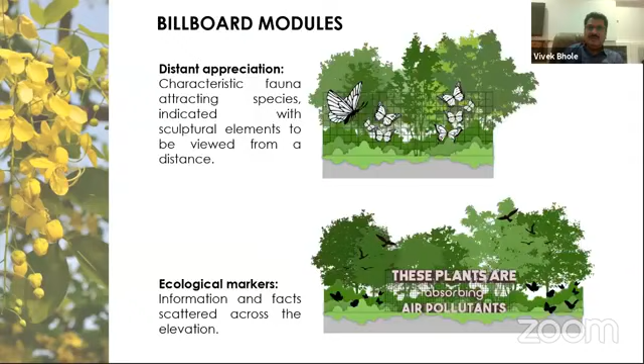Then ecological billboard is the other concept we adopted, where the entire facade will be divided into a mountain kind of pattern with different shades of trees, and we can have some kind of ecological message given to people, something like the trees are absorbing air pollutants, or some distant appreciation of species which are going to be visible there. So something like this can also happen on that area. This is the final picture,

and this is one part which I like most, the lighting of this particular building. This is the daylight, and at the podium level, this is the illumination. At the crown level, this is what is going to happen. But this is the best part of it. The permutations and combinations I can achieve through a single lighting system, a pixel lighting, can be enormous.

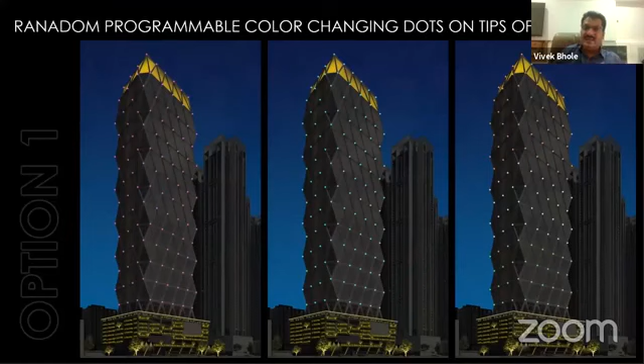So I can have something like this, or something like this happening. An inclined fins kind of effect, where they will go one by one, and in festive season like 15th August, I'll have the tricolor on the building. Or I can have something like this, maybe this, or this. So this is one lighting fixture which is going to give me all these possible combinations with just this pixel lighting. On top of that design element, I can have multiple permutations and combinations.

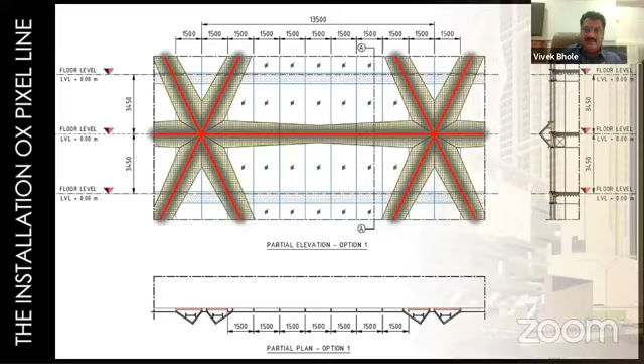And this ends the third case study. This is the final case study. This is an iconic steel tower we are designing. And this whole story started when they said, I have to design a 350 meter tall iconic tower. They wanted something similar to the Eiffel Tower and Tokyo Tower, and Steel Authority of India didn't disclose the location. Now I don't know the location, but there are a lot of things happening in this project, including politics and a lot of issues.

So when we say 350 meters, look at all those iconic towers across the world. Once you say Eiffel Tower, it's so symbolic, and something similar to the Eiffel Tower or Tokyo Tower is not going to be that creative, but then that was the design brief.

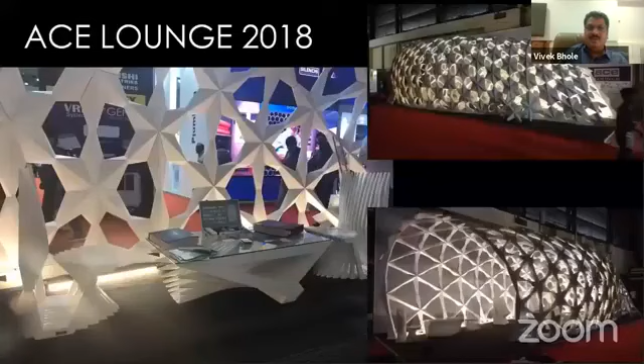So Eiffel Tower is 324 meters, Tokyo Tower is 333. So the design brief was 350 meters. We started with form finding, and I used again parametric softwares to find the form. This was one lounge I had designed in 2018.

Now why I am showing you this, because the whole idea was originated from this, and this was a 15 meter by 6 meter structure made up out of paper. So I use paper as a structural element. So if you see all these elements, they are just folded papers. We have kept few samples here, if you see, and this is how it was. And this was that paper element.

The paper was 2 mm thick, kind of sunboard, and when you get one element like this, 110 gram element takes load of 40 kgs. So that gave me the idea, and because Sterling Engineering was designing this structure for me, I shared this concept with them, and we started evolving the form.

So I started with a very basic form, a curvilinear one, and then divided that into levels, then added one restaurant level, one sky lobby level, and one viewing gallery level. And this is how the entire form was originated. Then I wrote the complete definition on Grasshopper to create a structural system and aesthetical element. Now this is very difficult to do with any manual method. So this entire geometry was generated through parametric, and this is how the final form evolved.

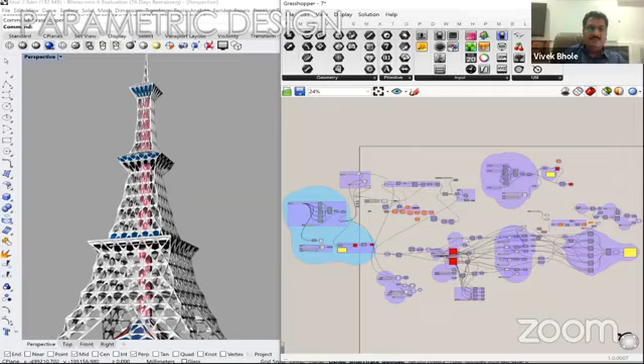So this is the entrance of that structure. At the lower level, there's an entrance plaza and the ground level. Then I've got a viewing gallery and a restaurant at 100 meters level. Then one more restaurant and public amenities at 200 meters, observatory deck at 300 meters level. And this is the model, the digitally printed model.

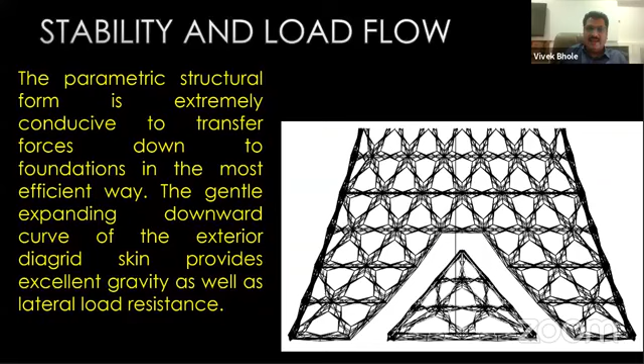Now to achieve this kind of geometry, not just from architectural point of view, but from structural engineering point of view, you require digital softwares. Manually, none of them is possible. So the stability and the load flow, you can very well imagine it's a pylon. So everything is going on the ground directly. Then the most important was nothing is cantilevered. Every element which you are seeing jutting out of the form is part of the form itself, and it's not a cantilevered element.

The central core will be done in slip form. It has got a number of elevators inside. Few lifts are stopping at 100 meters, then the 200 meters, 300, and a service lift is accessing all the floors. So the central core will take care of the entire horizontal forces, but the pylon itself is so stable that it doesn't really need that kind of support.